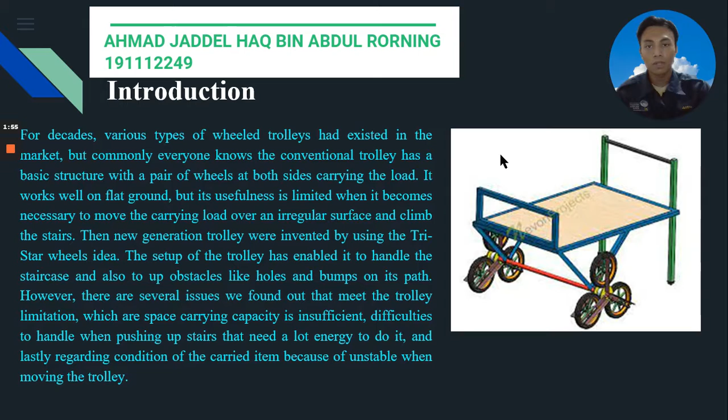For decades, various types of wheeled trolleys have existed in the market, but commonly the conventional trolley has a basic structure with a pair of wheels on both sides carrying the load. It works well on flat ground, but its usefulness is limited when it becomes necessary to move the load over an irregular surface and climb stairs.

Then, a new generation trolley was invented using the tri-star wheel idea. This setup enabled the trolley to handle staircases and obstacles like holes and bumps on its path. However, we found several issues limiting the trolley: insufficient space carrying capacity, difficulty pushing up stairs which requires a lot of energy, and instability of the carried item while moving the trolley.

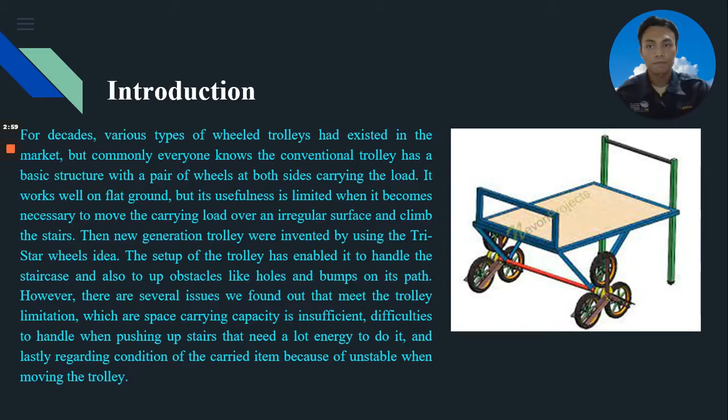Next, we move to objectives. We have three objectives for our mini project. First, to modify the staircase climbing trolley by improving its functionality and human factors considerations. Secondly, to design the project components using CATIA software, illustrating the orthogonal views of each part in each component and the isometric assembly drawing.

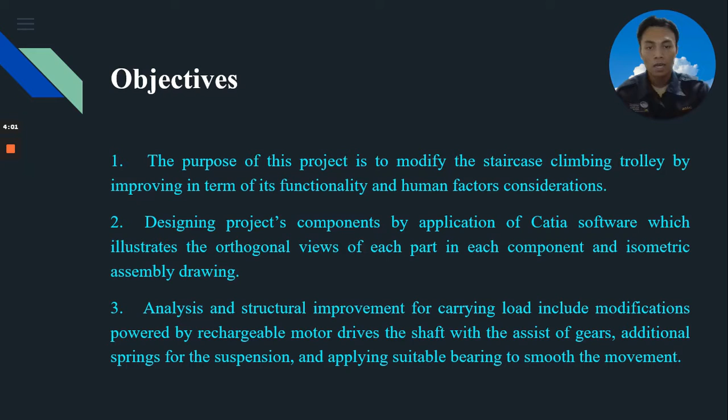Third, analysis and structural improvement for carrying load, including modification powered by a rechargeable motor driving the shaft with the assist of gears, additional spring for the suspension, and applying suitable bearings to smooth the movement.

Assalamualaikum, my name is Mohammad bin Masri, my matric number is 19110706. Today I would like to talk about the flowchart of our mini project.

Firstly, we do some research and study about the stair climbing trolley. Then we sit together to brainstorm the idea. Then we sketch out the idea. Then we do further research about the idea, whether it fits the criteria of our mini project.

Then we prepare the budget and do the proposal. If it fails or needs addition, we rethink the budget and redo the proposal. If it succeeds, we design components using CATIA software, make analysis and calculation. Then we do the report writing, and lastly we present the project.

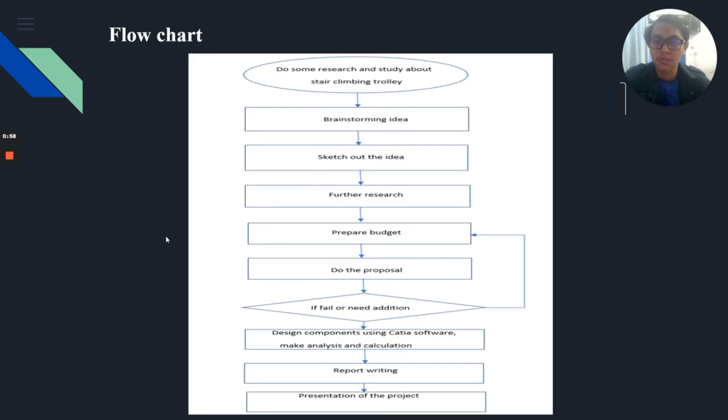Now I will talk about the Gantt chart. This is our Gantt chart. As you can see, for week 5 we identify group members. For week 6 we brief about the idea. For week 7 we choose and select the title of our project.

For week 8 and week 9, we discuss and prepare the proposal. Then for week 10 until week 13, we do the mini project, designing by using CATIA and doing calculations. And for the last week, week 14, we do the project presentation.

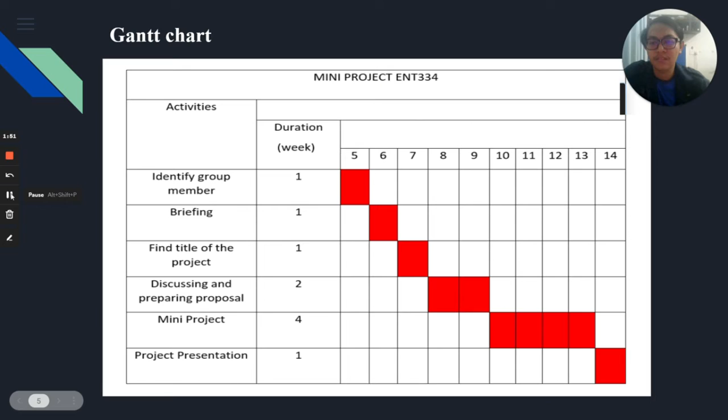Each of our group members designed parts for the improvement of the staircase climbing trolley, which are the gears, fasteners, welding, and bearings.

Pushing a heavy load trolley up the stairs could be challenging, as some people need extra effort to deal with it. To account for this, we designed a modification that installs additional power to support the user pushing the trolley. Installing a DC motor with a rechargeable power supply could help minimize the struggle to move the heavily loaded trolley.

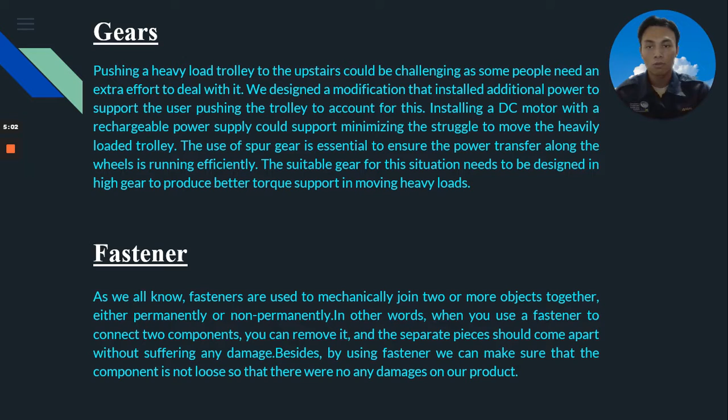The use of spur gear is essential to ensure the power transfer along the wheels runs efficiently. The suitable gear for this situation needs to be designed as a high gear to produce better torque support in moving heavy loads.

So what is a fastener? Fasteners are used to mechanically join two or more objects together non-permanently. In other words, when you use a fastener to connect two components, you can remove it and the separate pieces should come apart without suffering any damage. Besides, by using a fastener, we can make sure the component is not loose, so there is no damage to our product.

So what are examples of fasteners? For example, we have screws, bolts, and nuts. Why are these three components called fasteners? They are called fasteners because they share a common purpose, which is to hold objects together.

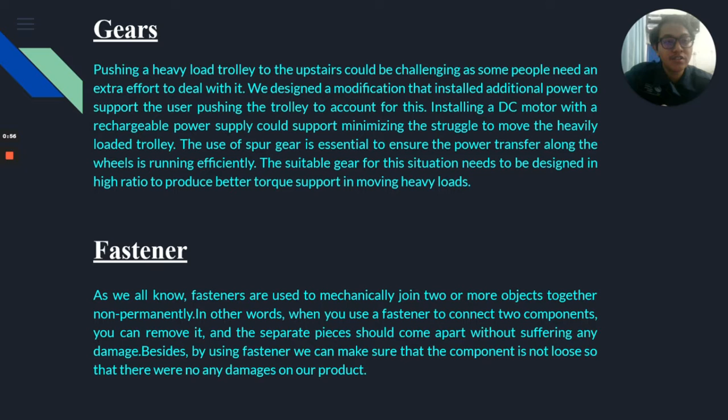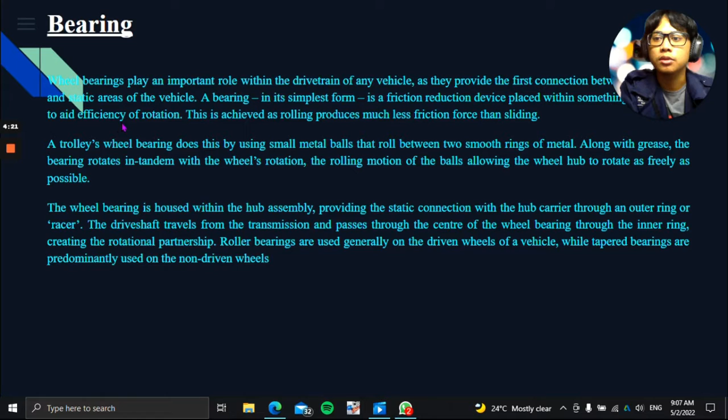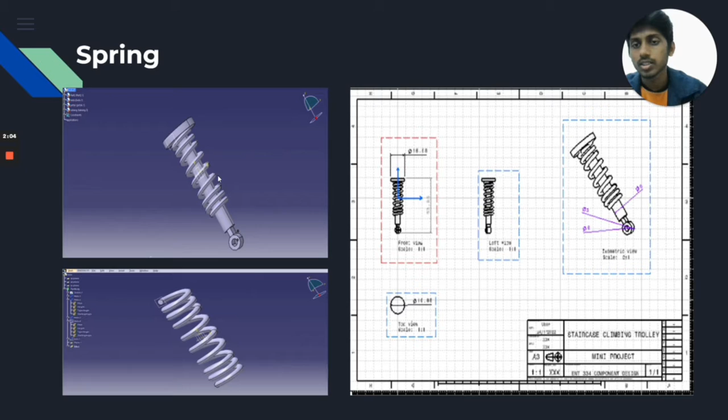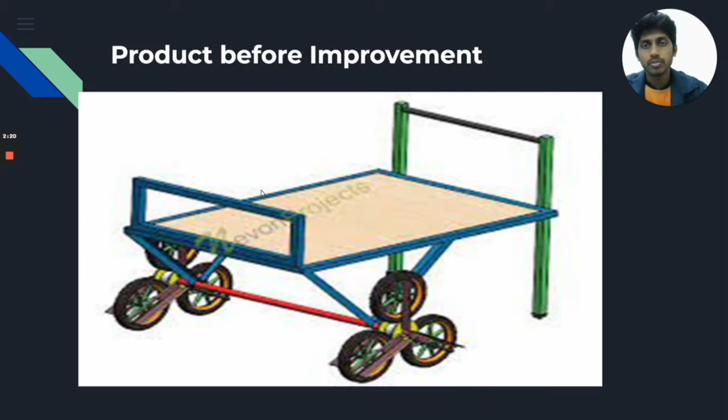Let's move to the next slide. This is the image of the product before the improvement. Now this is the final project. Here you can see where we added the spring, in between the tires and behind the gear.

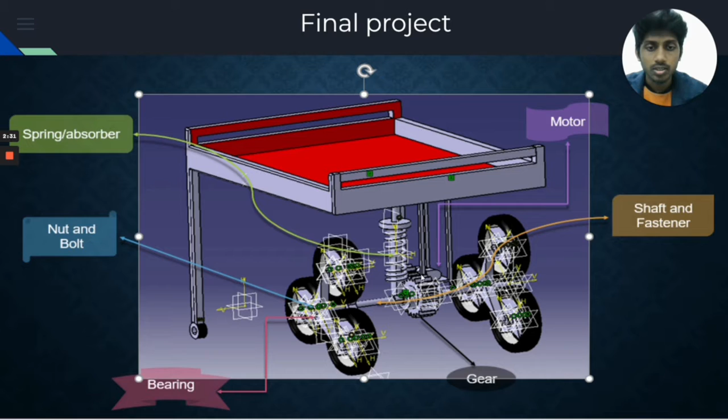These 4 bars casing seem kind of lengthy because they will be positioned between the wheel shaft and attached beneath the trolley. So this is the design for the body.

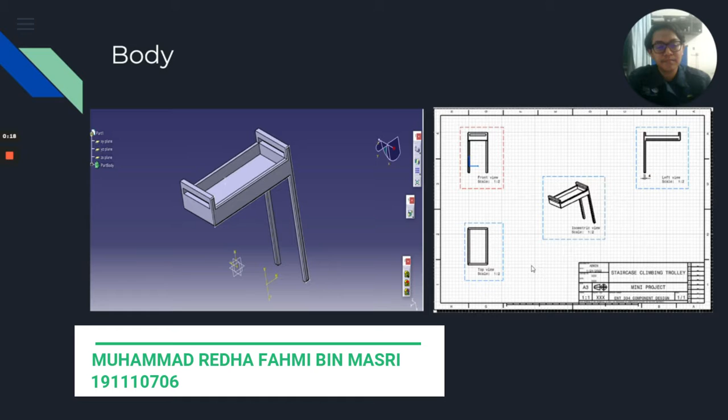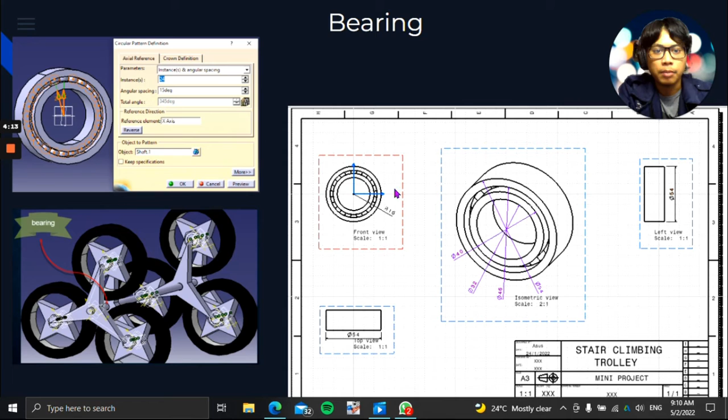We use 24 balls for the ball bearing, at 15 degrees each, with a total angle of 345 degrees. We put the bearing between our rim half and between the tires, using about 20 ball bearings in total. This is our plan for the bearing.

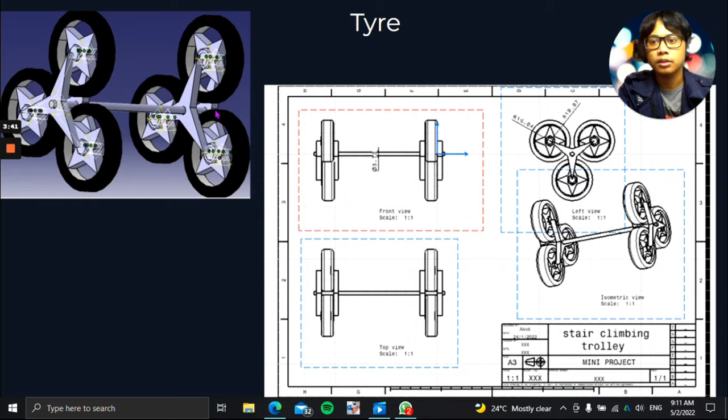We showed our sir our tire. Our tire uses the concept of a tri-star tire. The tire is very important for our trolley because it plays a main role in working with the ladder, making it easier to move from one level to another.

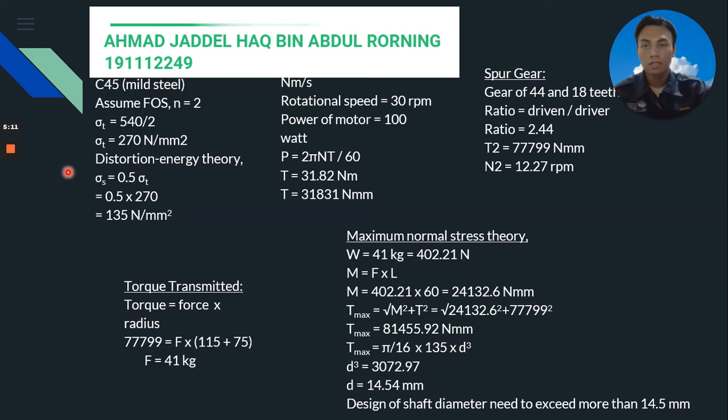This is our plan for the tire. In the design analysis of gear calculation, because the material we use is C45 mild steel, the factor of safety is 2. Using the maximum normal stress theory and distortion energy theory, we get the value of the yield strength. The design of the DC motor needs approximately 100 watts of power and 30 rpm of rotational speed.

Using this formula, we get the value of the minimum torque. For the selection of the spur gear, we need about 44 and 18 teeth to get this high ratio, because a high gear ratio is needed for this design.

This value is the torque and the speed. To find the load, we use this force in the maximum normal stress theory to find the moment, and use all the values in this torsion formula to find the diameter. This result is the minimum shaft diameter for the selection.

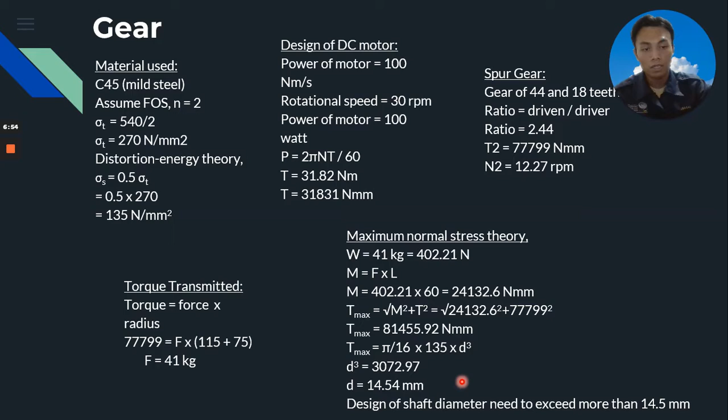Our shaft diameter is 20 millimeters, which is safe to be used.

This is the calculation for the body, which is a beam. The force is 500 Newtons. By using this equation, we get 56,250 Newton millimeters.

Then by using this equation, with this wide and this height, we get 4,116 millimeter cubed. To find the bending stress, we divide 56,250 Newton millimeter by 4,116 millimeter cubed, giving 13.66 Newton per millimeter square. So the bending stress induced is 13.66 Newton per millimeter square, which is less than the allowed bending stress of 270 Newton per millimeter square. So our design is safe.

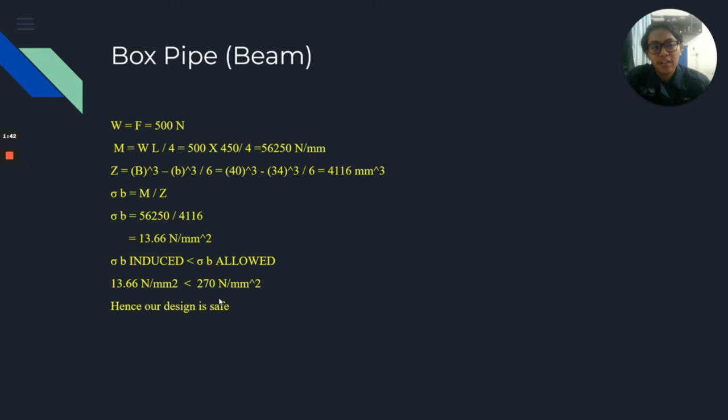Let's move to the fastener. This is the design for the fastener, which is bolts.

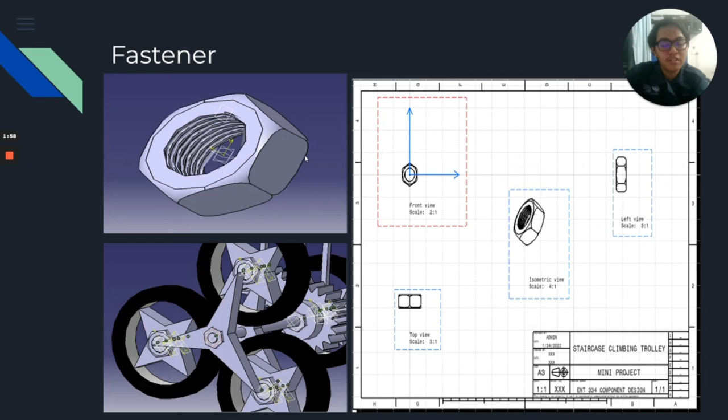So let's get straight to the calculation for the fastener. We use C45 steel. The diameter is 9.31 millimeter. Diameter of M10 bolt is 8 millimeter. So let us check the strength when the initial tension in the bolt when belt is fully tight.

So the force is 981 Newton. To find this, we use this equation. By using the equation, we get 19.52 Newton millimeter square. So the calculated tensile force is less than the maximum tensile force. I think our design is safe because the calculated tensile force is less than the maximum tensile force.

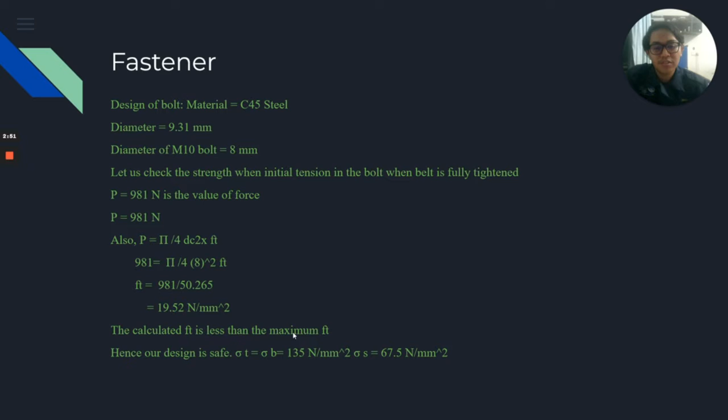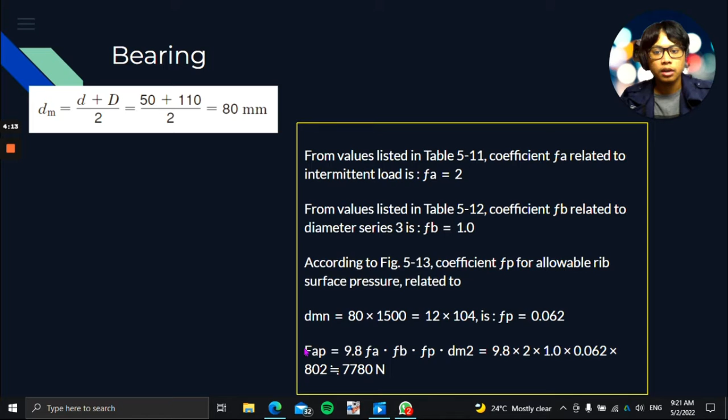This is the calculation for our bearing that we perform to make sure our bearing is strong and tough enough to carry our tires and perform for a certain level of friction, and of course their lifetime, our L10. We just calculate the allowable rate, and the coefficient FB and FA. So that's it.

So next we will continue with the calculation of the spring. Our material to build the spring is A227 HD steel. First we will calculate the spring rate. From table 10.5, the diameter of our spring is 2 millimeter. So the G value will be 78.6 gigapascal.

So the spring rate, we will calculate using this formula. Here we get 0.2729 gigapascal millimeter. Next, the length of unloaded spring is 35 millimeter. The OD value will be 6 millimeter. The spring diameter is 2 millimeter. So the number of turns of the spring is 9.5 coils, so the active turn will be 9 turns.

So hence we can calculate the pitch value of the spring. To calculate the pitch value, we divide the length of the unloaded spring by the number of active turns. So we will get 3.89 millimeter. The solid length will be active turns plus 1, multiplied by the diameter of the spring, so we will get 20 millimeter.

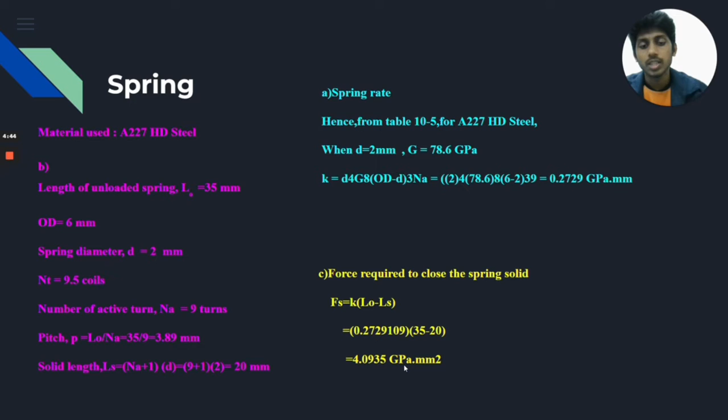Okay, this is our final view for our trolley. This is our scene, and we can see from this sketch we just separate the certain important parts of our trolley. We consist of the seat, tires, about 20 nuts, one shaft, one rim.

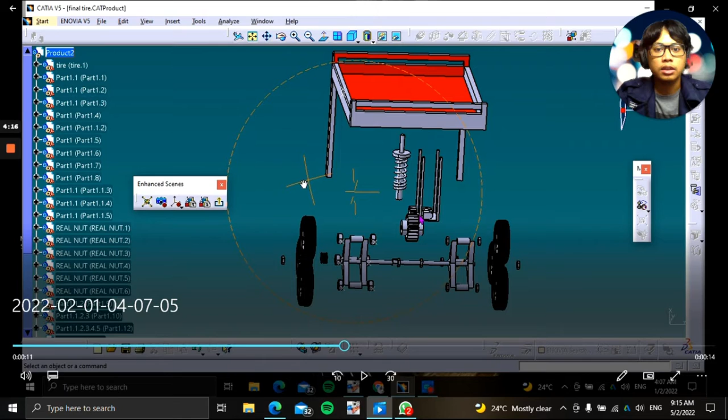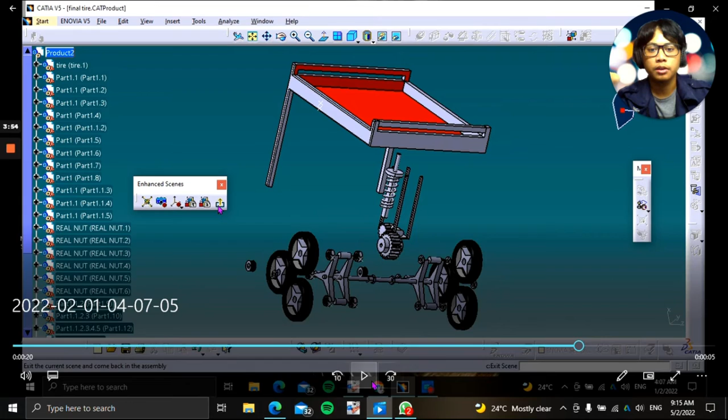This is the absorber, the body itself, and also the gear plus the motor. And we have adjustment for the left, right, for the bottom and the top. This we use the enhanced scene, and we just did it by ourselves by learning from YouTube. Yeah, he is just like that.

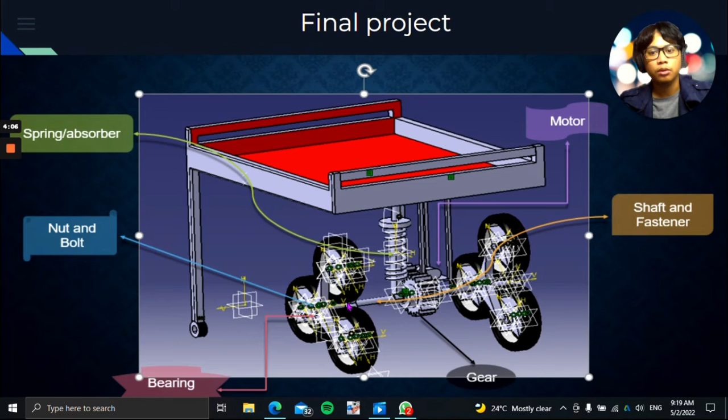To make our trolley clear enough to understand its function, we show the exact place where we placed our parts. At first we have the absorber there for the nut and bolt, bearing in the middle, and the gear and motor we combine together. When the motor moves, with electric power, the gear also moves, and the gear will move the shaft and also our tire and the shaft and fastener, of course.

So lastly, as an overall conclusion, the improvement of staircase climbing trolley will be beneficial in workshop or vehicle repairing. In this mini project, we have learned so much information from doing tons of research and collecting information. We can also know how to design a project using CATIA software for assembly part and orthogonal design for our mini project.

So in the end, we came out with an idea to design a spring, shaft, bearing, tire, gear, and fastener to improve our selected product. So the improvement in design is useful to manufacture this machine at low cost with capacity to handle the load. We have gone through this idea by completing the component design process, such as finding ways to make improvement on the project, making calculations involving orthogonal assembly design using CATIA software, and making evaluation of the project. In the end, we are so happy with the outcome of our mini project.

We hope with all the technical information that we got from this mini project, it will be very useful to our future and projects during our engineering study and work life. Alright, so that's all from our group. Thank you.